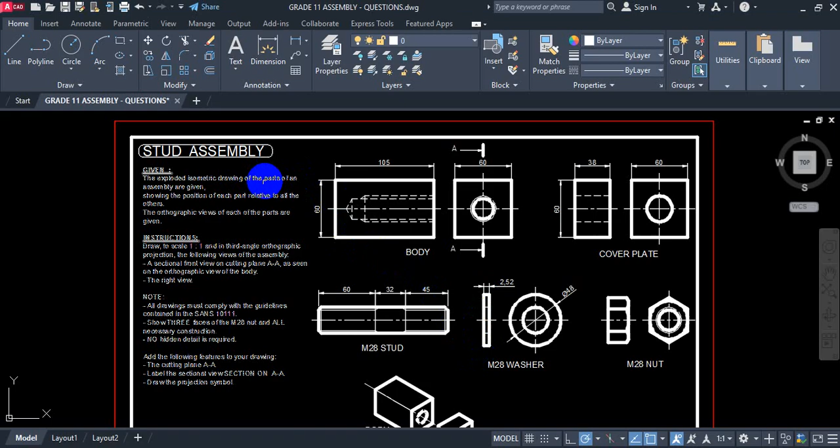We have a stud assembly to do here. We are given the exploded isometric drawing of the parts of an assembly, showing the position of each part relative to all others. We are also given the orthographic views of each of these parts. Let's go into the exploded isometric view. It's simple.

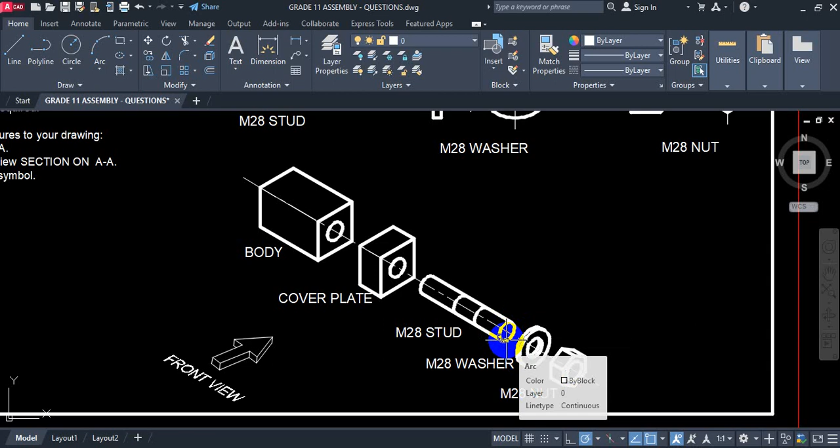The cover plate must sit against the body, it's the same size. The stud, M28, must go through the cover plate into the body. The washer is also M28, meaning it fits onto the stud and will go in and sit against the cover plate. The nut is also M28, which is the size of the stud. It will go in and tighten everything, and everything fits together nicely. That is the idea of assembly.

They are showing us that this is the front view. So all these views are the front views, and that's the right view.

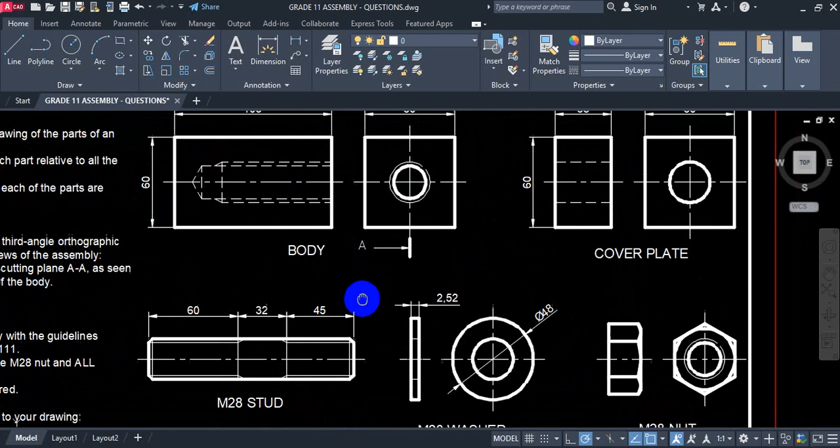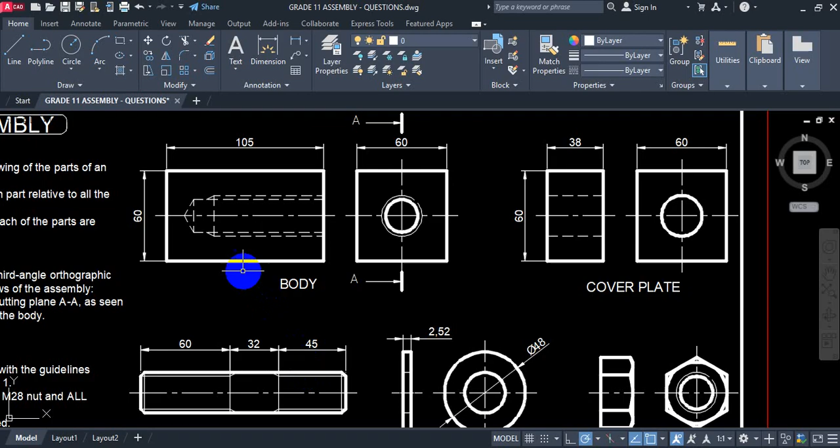Then we are given the orthographic views. Orthographic views help us with dimensions as to how to draw this part and how they fit. Everything that we see here will have dimensions. This is the front view, that's a right view. Front, right. Right, front. Right, front. And this is just the front. So it means everything that we do, we have to draw the dimensions.

The first thing that we need to read is the instructions: drawing to scale 1:1 in third angle orthographic projection.

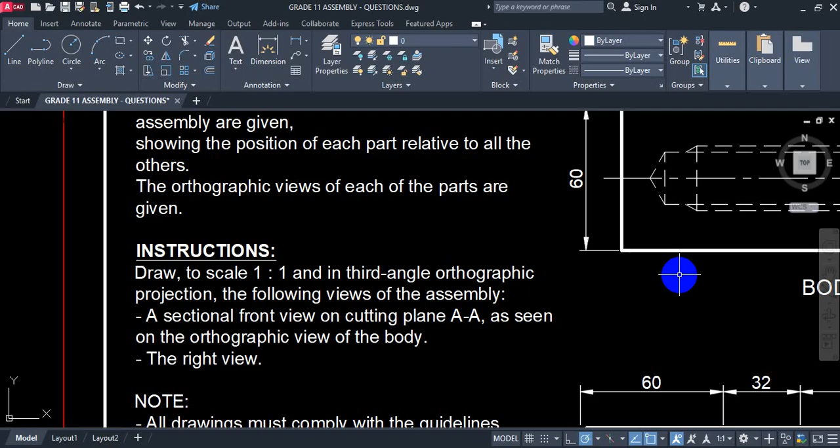Stop right there. If you are drawing in a third angle orthographic projection, there is a rule which must be followed, which says what you see from the right must be drawn on the right, what you see from the left must be drawn on the left. So basically we're saying if this is the right view, this view here must be drawn on the right hand side because it's in that angle.

So they want us to draw a sectional front view on a cutting plane AA as seen from this orthographic view here. There's our cutting plane. So this is the view which we will section. It means this will become a sectional front view.

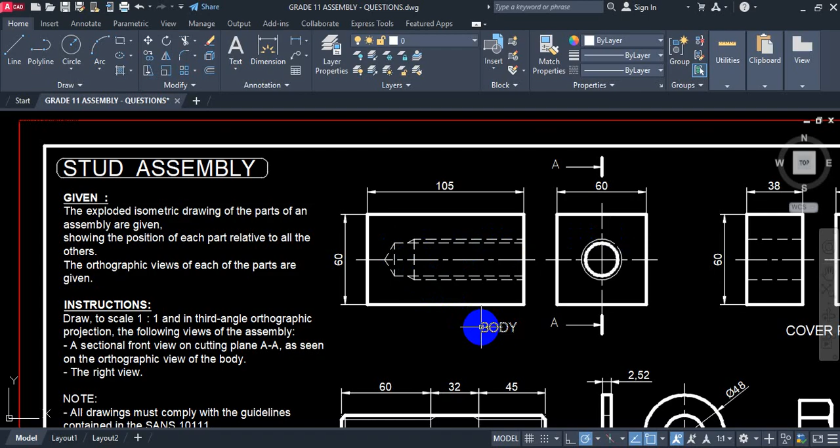And I must also draw the right view. So it is important to start with the right view. Everything that must be drawn on the right, that must be drawn, so that I project everything to the front view. Set up the page, then you start drawing. So this is the kind of situation that we're looking at.

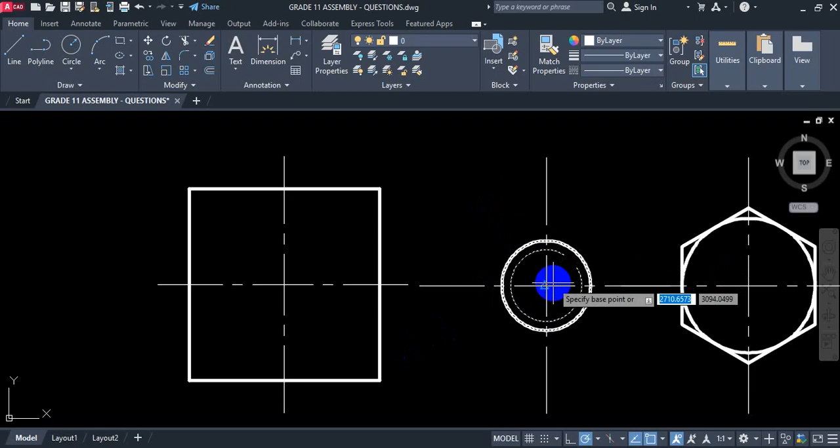This here is my cover plate using all those dimensions. Now, after drawing the cover plate, I need to bring in the right view of the stud. The right view of the stud, this is the stud. Then I bring in my nut. Now I need to bring in my nut. That's my nut.

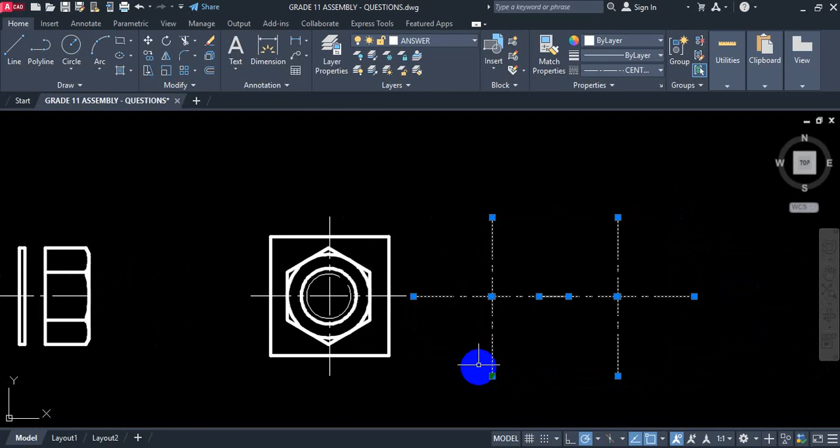So now all I need to do is get my cutting plane. So this is the complete right view. Let us see from the question. From the question, using this view here, what we see is the washer, we see the nut, and we'll see the right part of the stud.

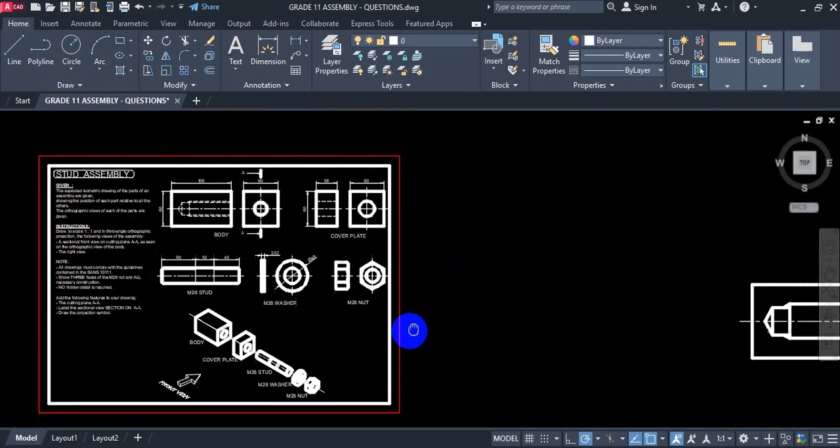We've got all that. Now here, we know that this cover plate must sit against the body. So that's what will happen. That's number one. Number two is to take this stud.

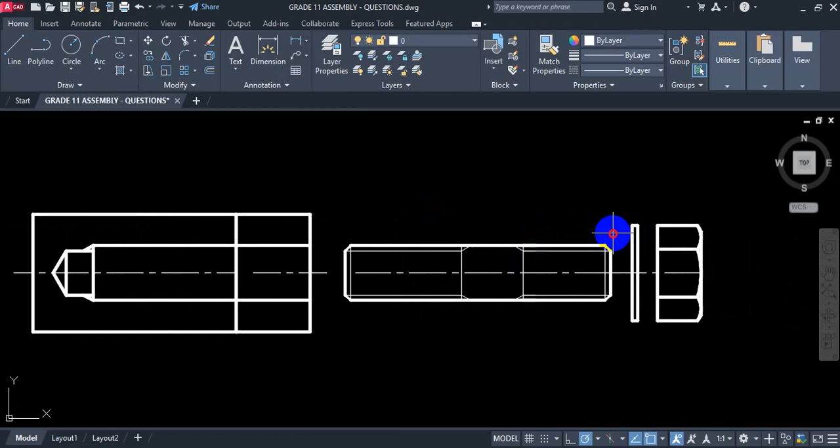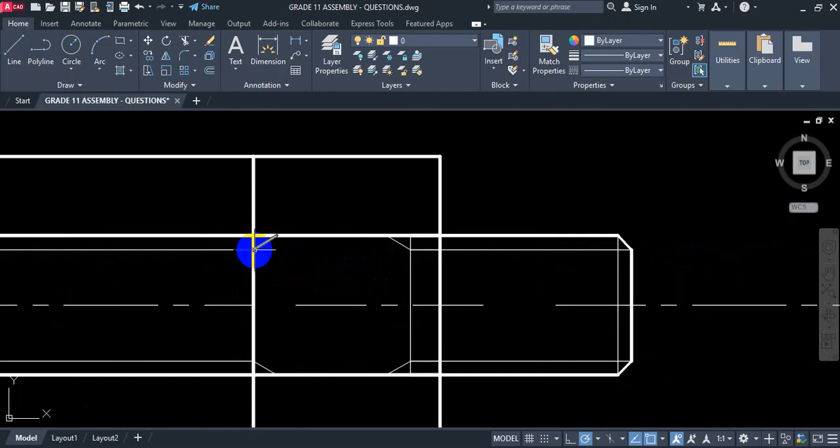And the stud must go into the cover plate. It goes in where the threads are. This is where it will fit. These are the threads, so that's where it starts.

So there's my stud going in. After the stud, I need to bring in the washer. So the washer also moves. It goes in and sits against the cover.

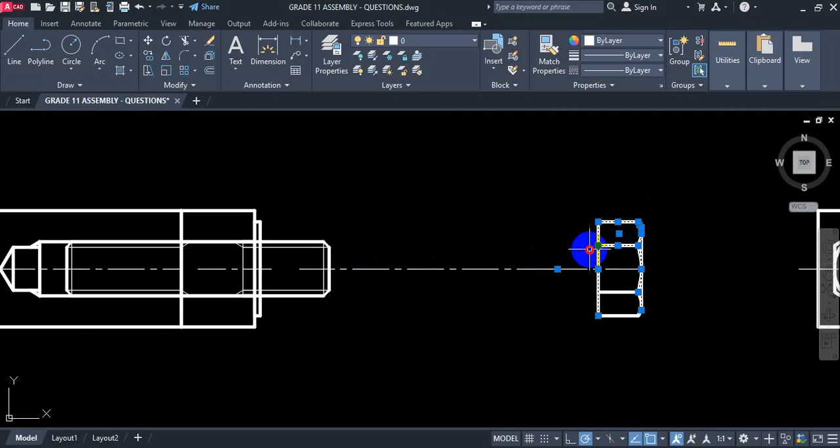Now I need to move in my nut. The nut will do the same thing. It will move and sit on the washer. However, let's bring this close to one another.

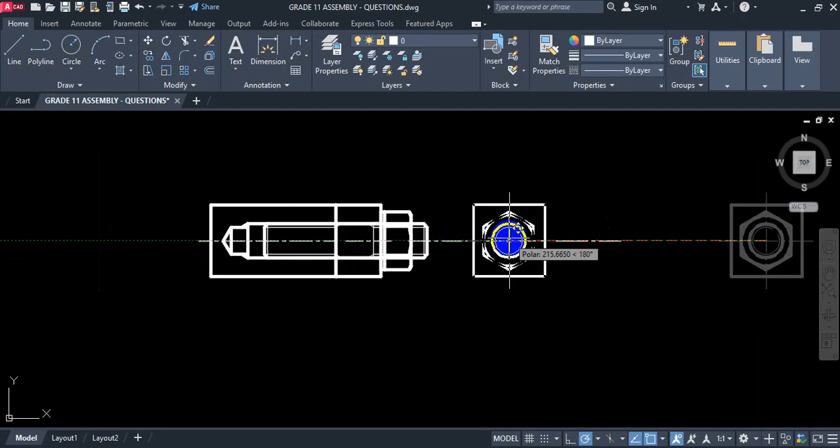That should be enough, because we don't section the nut, so I don't have to see that. So that must go away, and it must also go away here. That must go away there, and that must go away there. Likewise in this case.

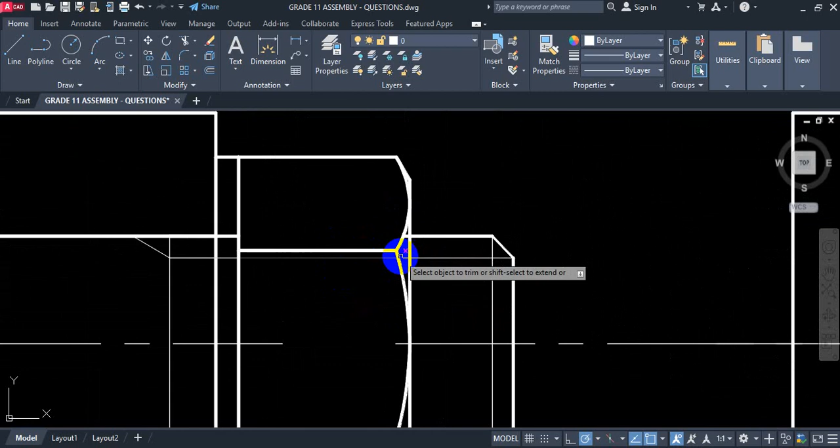I don't section the nut, rather the washer as well. Therefore, that goes out, that goes out. Means I don't see these things. It means I don't see those things.

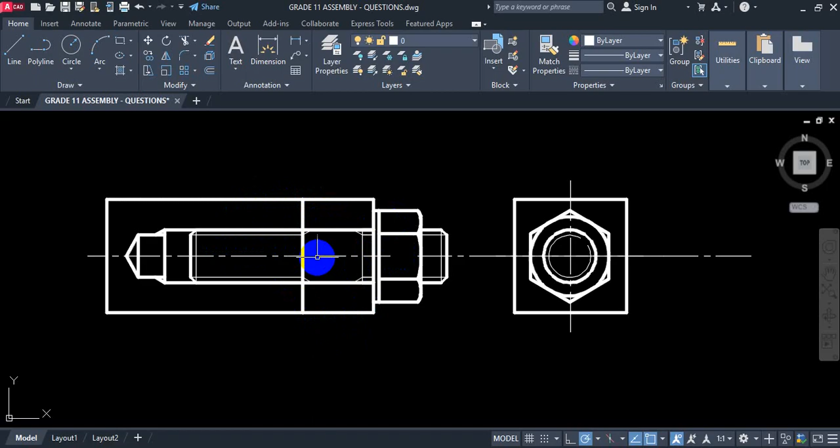Now, all this has been done using those dimensions. All I need now is to do hatching. There are two things that must be hatched here: the body and the cover plate. We don't hatch the start, and we don't hatch the washer, and we don't hatch the nut.

So when everything has been concluded, it means I must have a cutting plane on the right view. It must be labeled. As you notice here on section AA, the hatching is used at 45 degrees square, because it's two components sitting against each other, that's why the hatching is going in different directions.

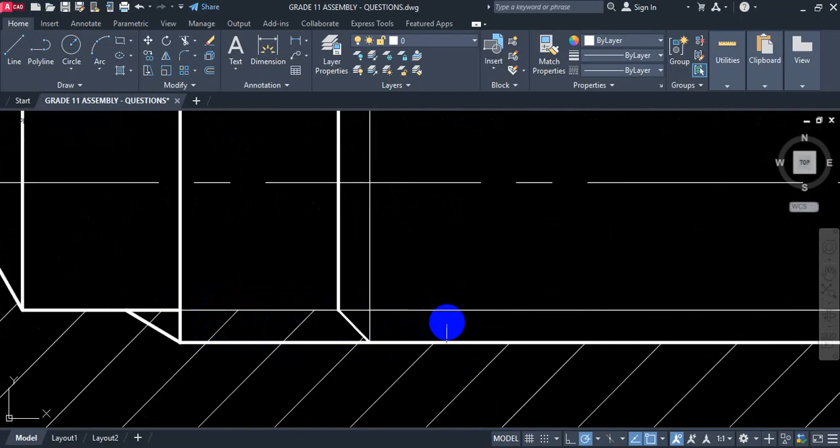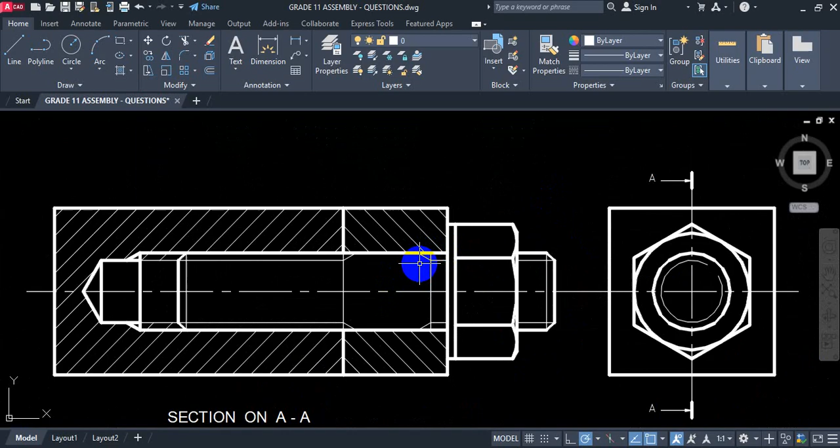Mind you, here we will also do hatching because we don't section the stud, but these are the threads that the stud could have gone in. Therefore, we have to show hatching here as well as there. That's why this line is drawn light. And like we said, here we don't hatch the washer, and we don't hatch the nuts, and we don't hatch the stud. So this will be a complete section of the stud with all labels.